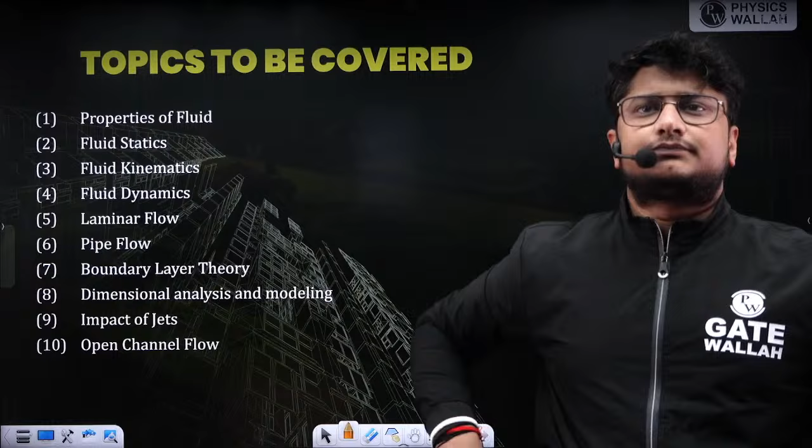Okay. So any doubt or any query which you want to discuss, or directly we'll go for the numerical. Any doubt or any query if you are having first, you can tell me, or else we'll go for the discussion.

Directly numerical? Okay. So first of all, I think it is clear to all of you that in this Super 20, basically we solved 20 questions, which is a PYQ question. But first I will ask those questions to you, which maybe Tiger have asked some doubt or Ankit have asked some doubt. So I will discuss that question first so that all your doubt will be cleared, and then the remaining PYQ I will discuss. Is that okay to all of you? So first I will discuss the doubt which you guys have asked. Let's start with that only.

This question, I think, is from you only. Someone have actually asked this question. Who asked this question? Is that person here?

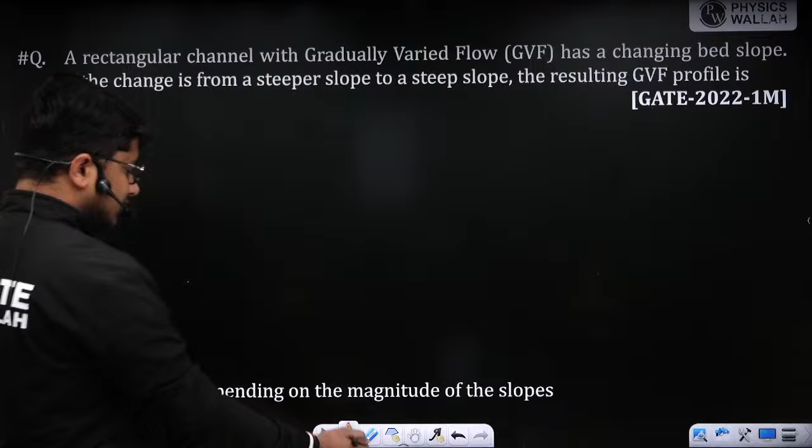If you see the situation here, what they have given you is steeper slope to steep. In the first case, steep, that means somewhere here you will have the NDL, and somewhere here you will have the CDL, because in the steep part CDL will be on top, NDL will be below.

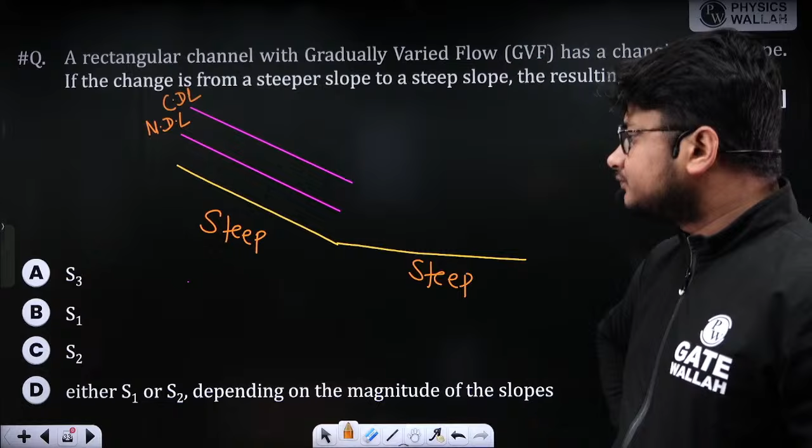Now, as you are going from steeper to steep, that means are you actually increasing the slope or decreasing the slope? I want the answer from you guys. You are actually increasing the slope or decreasing the slope? Decreasing the slope. So if you are decreasing the slope, does depth have to increase or decrease?

The water surface profile which will be there from the steeper to steep, will it be a rising water surface profile or a falling water surface profile? That only I want from you. As I said, this type of question you have to answer with the basic logic which I told you. Only the basic logic is useful. Will it be a rising flow or a falling profile?

You are actually decreasing the slope. So if you decrease the slope, the depth has to rise. And if depth has to rise, will it be a rising water surface profile or a falling water surface profile? Rising. Now look at what you guys are answering. Many of you are answering S2. Is S2 a rising water surface profile or a falling water surface profile?

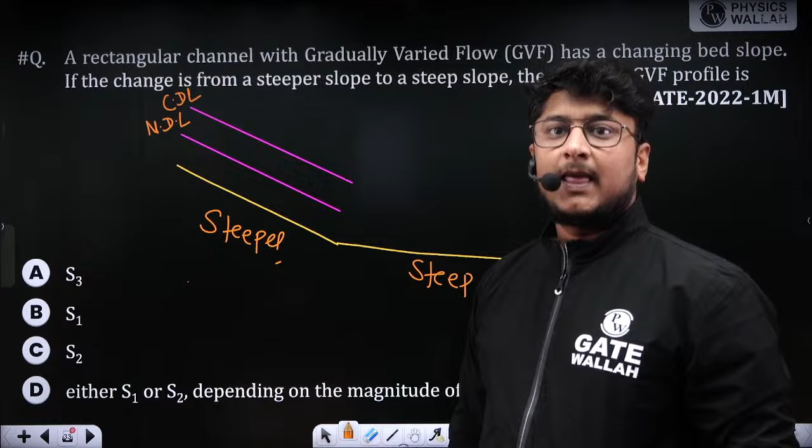Yesterday also I told you, if you don't know the 12 water surface profiles, their nature, their characteristics, then doing this type of problem will be a problem for you. S2 is a falling water surface profile. So S2 is not an option here. It is a rising surface profile that is going to come.

Now in a rising water surface profile, you also have the option of S3 and S1. S3 starts from the channel bottom and S1 starts above the CDL line. Now, in this section, do you really think in the transition part the water level can rise above this situation? Just your thinking I want. Or instead of that, will the water level rise from here, somewhere from here?

Like this. Now if it goes like this, that is a case of S1. If it goes like this, it is a case of S3. Now, after knowing all this concept, I'm asking a basic question to all of you.

Once again, I told you, to solve this type of problem, you need to know the 12 water surface profiles, you need to know the basic characteristics, and then small common sense is also required.

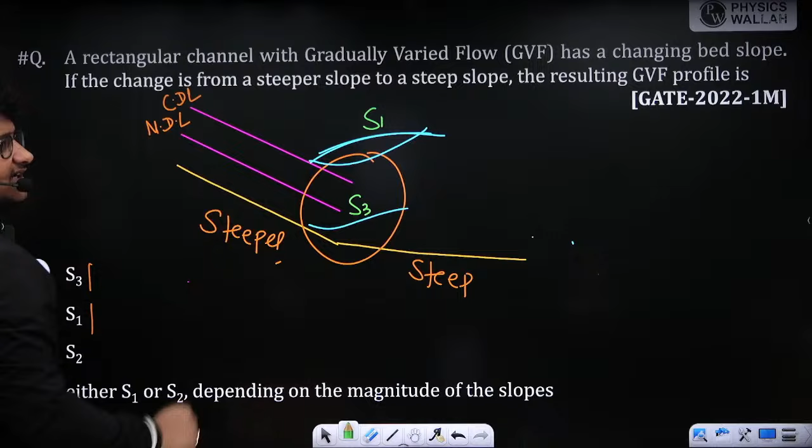If the water is coming from a steeper cross section, it will rise like this. You will find here that your y is lesser than the critical depth. That means you will get a small hydraulic jump type of situation. So it is going to be the S3.

Your answer will be A. I think only one student has answered correctly for this question.

Now tell me, was this question difficult for you? Frankly speaking, I want an answer from you. Was this question difficult for all of you? I want an answer from all of you.

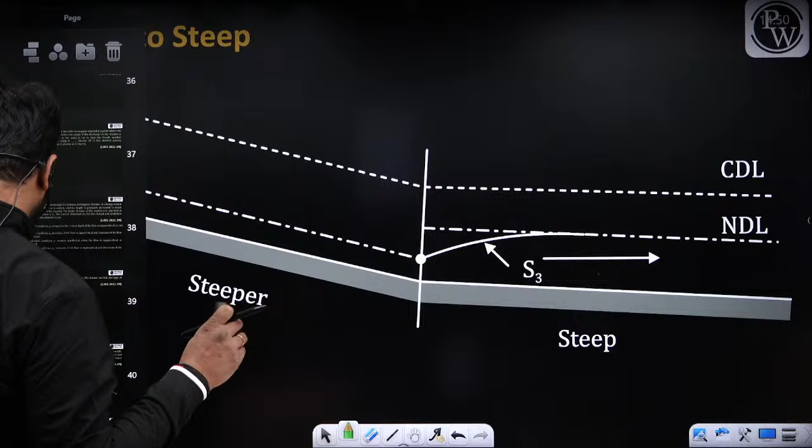Okay, like this, only one more question they have asked.

Somebody who has remembered the data itself, in that case, you have to wait for others.

A very wide rectangular channel, that means simply it is an R equal to Y type of situation, carries a discharge of 70 meter cube per second per meter width. It's a typing mistake. Its bed slope changes from 0.0001 to 0.0009, mild to steep, as shown in the figure. The Manning's roughness coefficient of the channel is 0.01. What water surface profile exists near the point P?

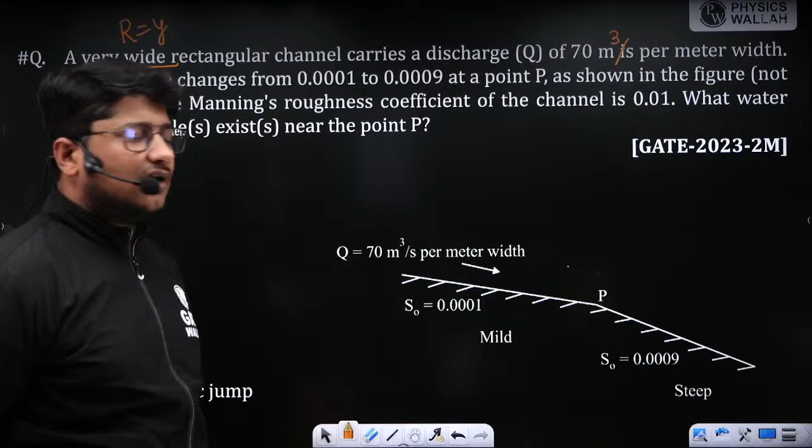Now, if you try to solve this step by step: mild and then steep. So definitely in the mild, after that mild you are having more slope, so the water level is going to fall. If the water level is going to fall, it will be an M2 profile. Now in the steep section, again it's falling only, so it will go like this.

To show this in detail, first you draw the critical depth line. This was the CDL, and this was the NDL.

So this will be M2, this will be S2. Without even solving, we got the answer. Clear? And that's the reason many of you have already answered this.

One more problem - I think you guys discussed this problem a lot in the Telegram group, I have seen. Try this question.

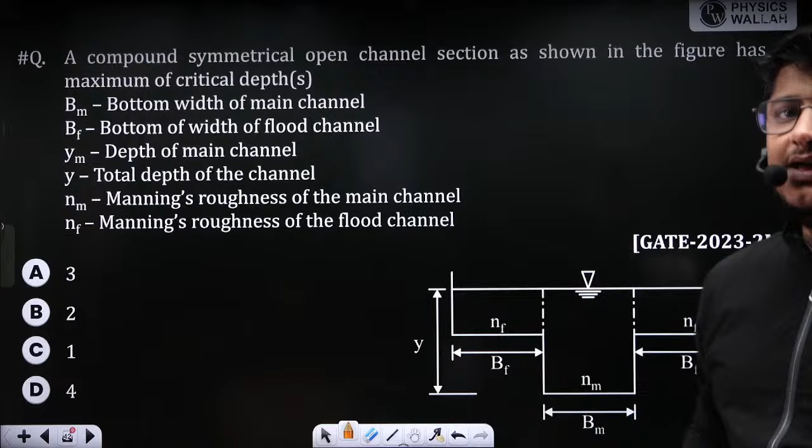Now this problem is something like when it came in 2023, many of you guys were not able to solve it. I can understand the reason why - in our GATE syllabus, we generally don't discuss the combined cross section. If you use your logic, you will get the answer, but generally we don't discuss the combination.

This is basically a combination of section. We can call this a compound system or compound section. Anybody? Any guesses or anything like this?

Compound section - we generally discuss this when you go for water resource engineering masters. There we discuss the compound section a lot. During my masters, actually, I have studied these things.

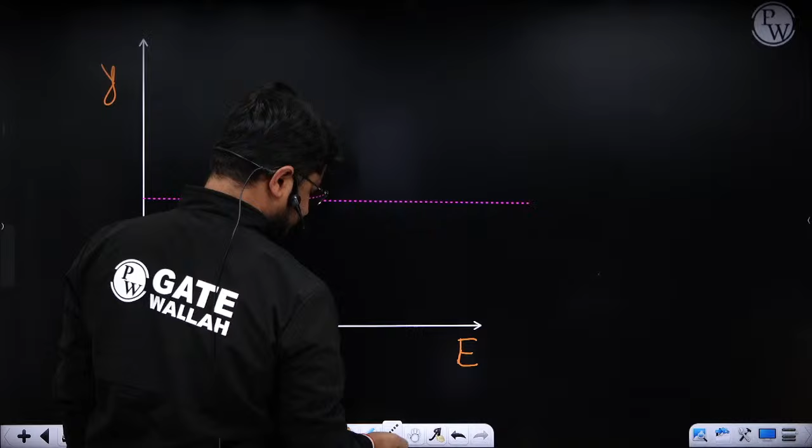So in a compound system, this side you are having the Y, and this side you are having the specific energy, E. A small curve I am making for you. After making that curve, then you can understand this problem easily. This is the flood plain.

And that is a depth Ym. That is a depth Ym. Okay. Gamer PUBG is telling, sir, not able to understand what they are actually asking. You know the concept, only the application part you don't know, because I know this question was a little bit out of the track, but we can try with the basic knowledge you have for the critical flow.

Now, what they're asking you here, as it is a compound system, they want the maximum number of critical depths which is possible. What they have given you, BM is the bottom width of the main channel. This was the main channel here. So this is a cross section of the channel.

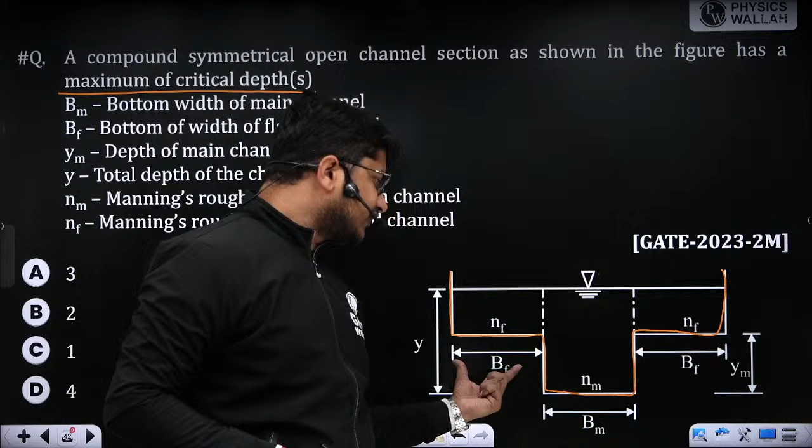If you notice in this cross section, here we are having a different Manning's coefficient, NM. Here we are having a different Manning's coefficient, that is NF. Here we are having a different width, and here also a different width. Now, Ym is the depth of the main channel, and Y is basically called the total depth of the channel.

That means currently the flow is at this point. All the terms are known to you. Now my question is to all of you. See, here they are asking only one case, but I'm going to explain 3 cases, because maybe in future if they ask a question based on this topic, you guys will be able to solve it.

Now see here, you only will tell me. Now if flood is not going on, normal flow is going on. So during the normal flow, only the main channel will be involved. Yes or no? Because this channel is having some depth, na? So this part of the cross section will be involved only when you have some floodplain or extra flow type of situation. In a normal flow, you will have only this part in a working condition. Am I right or wrong?

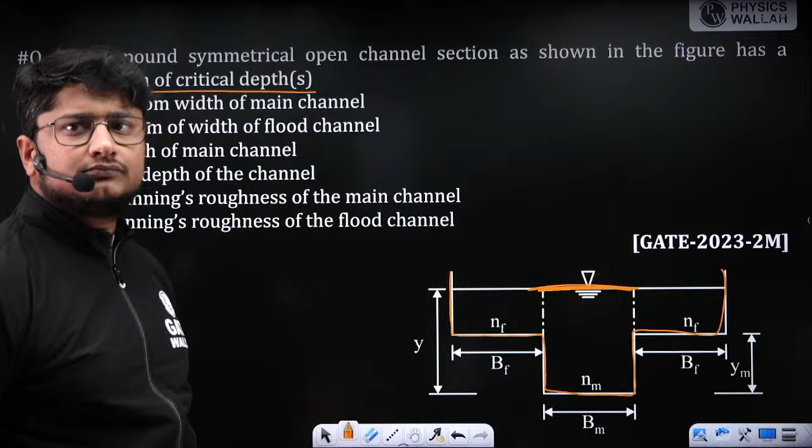In a normal flow, you will have only one part working, that is nothing but the main channel. Do you all agree for this point? Basic discussion. Whatever it is, rectangular, square, whatever cross section, during normal flow only this part of the channel will be in a working condition. Now that is the first case for you.

During that first case, how many critical depths are possible only when the main channel is working? If I want to draw it here, it will be like this. YC1, this is your C1 point. Only one. Okay. Now go to the next case.

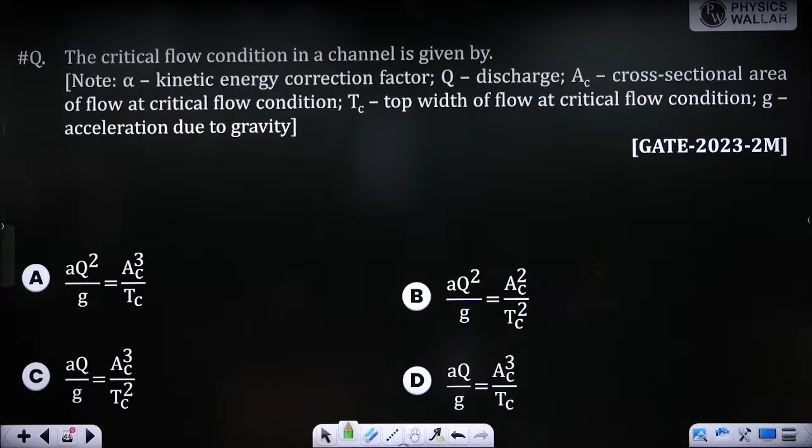Now once complete flow is going on, in that section, do you really think more than one critical depth will be possible? The reason I am saying it is because here we are having a different Manning's coefficient, that is Manning's roughness constant, different than the main channel. So with different discharge, more than one critical depth will be possible. I want something from you guys.

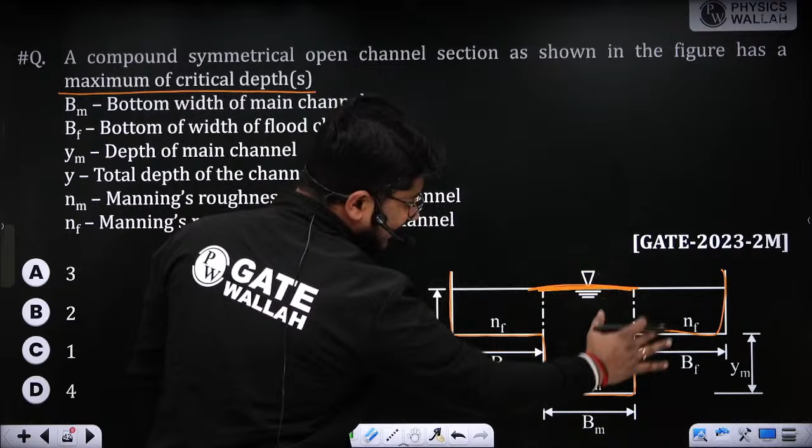Now, the same thing if I want to draw here, the situation is that when the flood came, the complete area will be flooded. Now the extra flow is going on. In that case you will have something greater, let me make it somewhere here. This is for a different discharge, which is definitely more than Q1, which was the initial discharge.

Okay. Now, in the combination phase, that is in between, you will notice three types. It is a standard figure, so that is the reason I am drawing a random figure. One is C3, in between is C2, and the normal was C1. And this discharge is Q2. So Q1, Q2, Q3, as you shift right, Q1 will be lesser than Q2, and Q2 will be lesser than Q3.

That is the case we need to understand. They are talking about the maximum critical depths possible. So the critical depths will be C1, then C3, and in between we have C2 also. Clear regarding this?

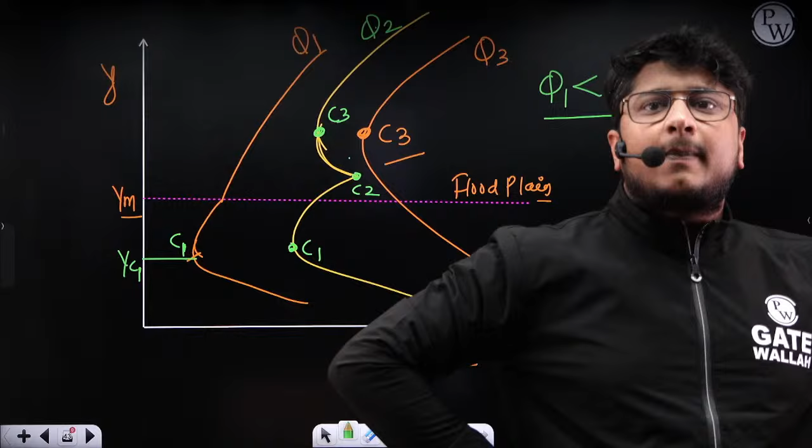What if there was no symmetry? First of all, understand, I'm not talking about a case which is related to this part. What I'm talking about, these are the cases which will be possible. If your flow is only under this, only one critical depth point you will find. If you are having more discharge, very high discharge, in that case again you are getting only one critical point. Critical point means maximum discharge point or minimum specific energy point.

Now, if you are having in between the discharge Q1 and Q3, you are having the 3. Actually, C3 and C1 exist, and between this, we are having a C2 also. So that is the reason we have made this type of curve. And it is not related to the symmetry part.

That means you will say, sir, here if you are having a different width, here also you are having a different width. In that case, the value can change, but not the situation, not the concept. Is that clear? Value-wise, YC1, YC2, YC3 can change, but situation-wise it will not change.

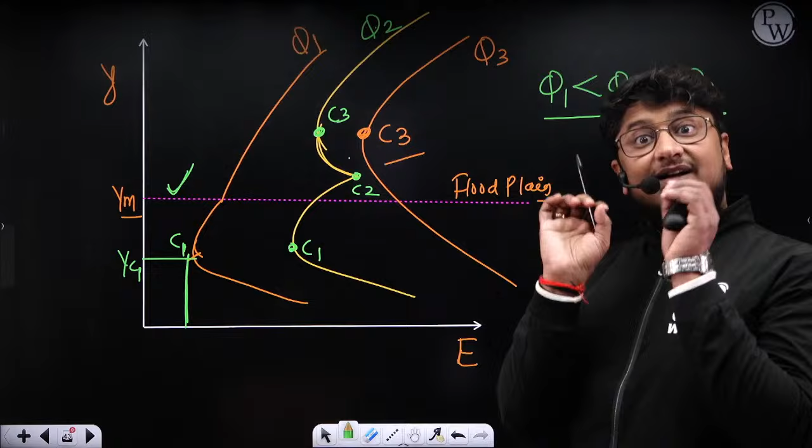Like your YC1 will be always less than YM, lesser than the floodplain. That is completely true. Even if you are changing the symmetry and all, your YC3 will be more than YM. That is also completely true, irrespective of what cross section you are having.

Now, once again, as this is a part of your question, that's the reason I have discussed. Still, I have not included this part, compound symmetrical open channel, in our course. But if you guys want, I will include this for future discussion. What do you think? Should I include this? Because only 1 year they have asked, and generally we don't include it in our syllabus unless they ask 1 or 2 times more.

Actually, it's a part of your master course. When you go for a master's in water resource engineering, then you have to discuss this compound channel in detail. Here I have told you directly, but you have to make it also, by taking data and all. Right now, the graph I have given to you.

Okay, so right now they have asked you about the maximum one. So that's the reason 1, 2, 3. Your answer was 3. If they ask the minimum one, then our answer will be 1. Clear? Clear to all of you?

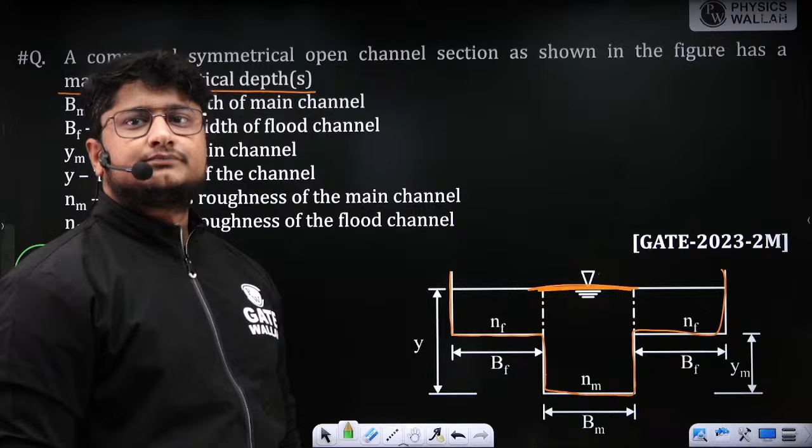Okay, so this question I think many of you have asked me. That's the reason I have discussed it. Telling this much detail in Telegram is difficult, na? Achha, one more question. I think this also someone has asked. Is it the right problem? I'm not able to type it properly, so I am using the screenshot here. Who has asked this question?

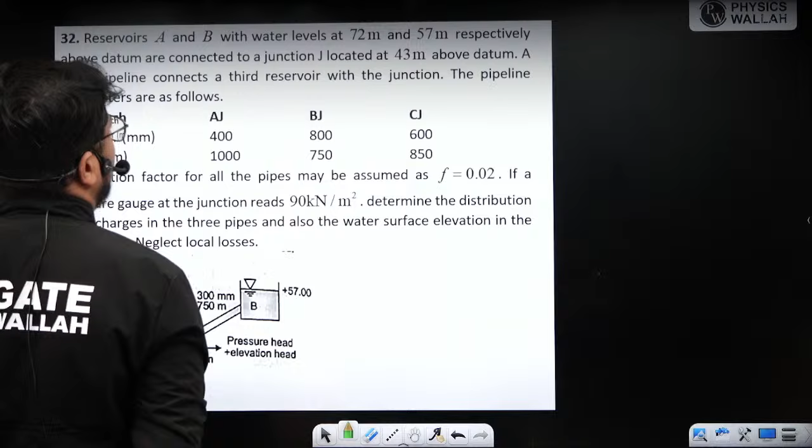First of all, your name is something which I'm not able to pronounce. Try this question. Try this question. Okay.

Reservoirs A and B with water levels of 72 meter and 57 meter respectively above datum are connected to a junction J. So J was the junction. Three reservoirs A, B and C. A and B, okay. Junction is located at 43 meter above datum. So they have given you the datum head. And for reservoirs A and B also the water level, so there also they have given you the datum head, okay.

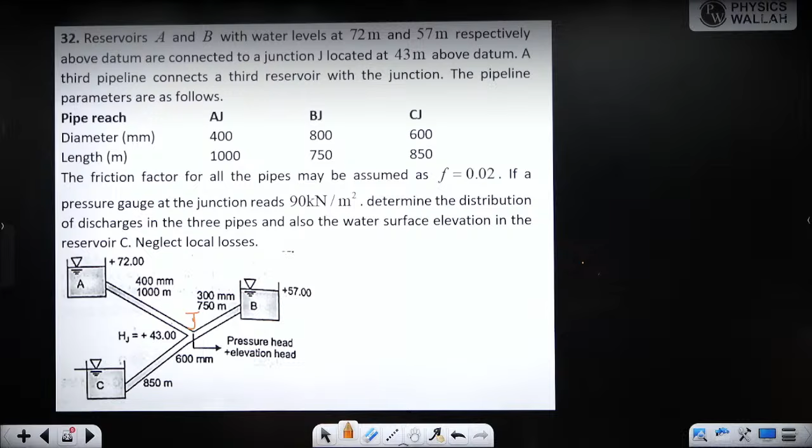The first thing I want from you: tell me the piezometric head at junction J. Piezometric head means pressure head. Pressure head is 90 kilonewton per meter square divided by its water, so 10 to the power 3, and the g value they have not mentioned, so I will take 9.81. And the elevation head is 43 meter. So piezometric head at junction J, how much are you guys getting? First things first. According to Kushal, 52.174.

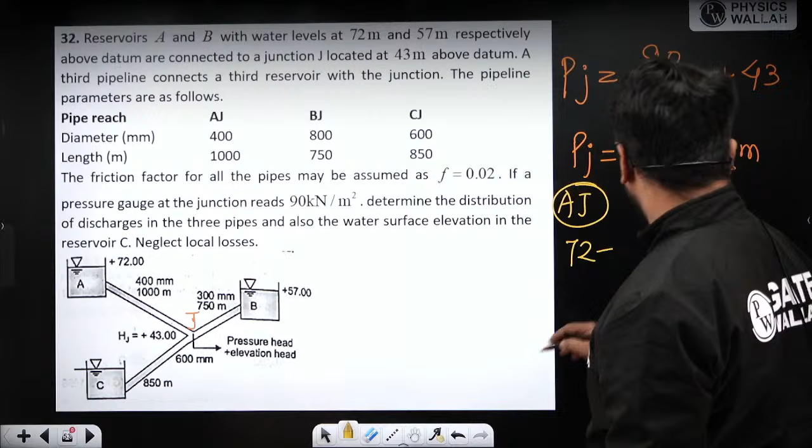Now here we have a piezometric head of 52.174, and for A and B they have already given you the water surface elevation. That means the pressure will be 0. So the total piezometric head here will be 72 and 57. They want to find out discharge, so one by one I will find it out. Let's first talk about AJ. For AJ, the head loss will be 72 meter minus 52.174, and I'm considering only the friction losses here. So for that reason, f is given to you. So it is f into L into Q AJ squared divided by 12.1 d AJ to the power 5.

Now according to the question, 72 minus 52.174 is equal to the value of f we have. Friction factor is 0.02, which is given to you. Length AJ is 1000. f L Q squared, so discharge is something I want you to find out, divided by 12.1 into 0.4 to the power 5. So I expect all of you to give me the QAJ value in meter cube per second. First part.

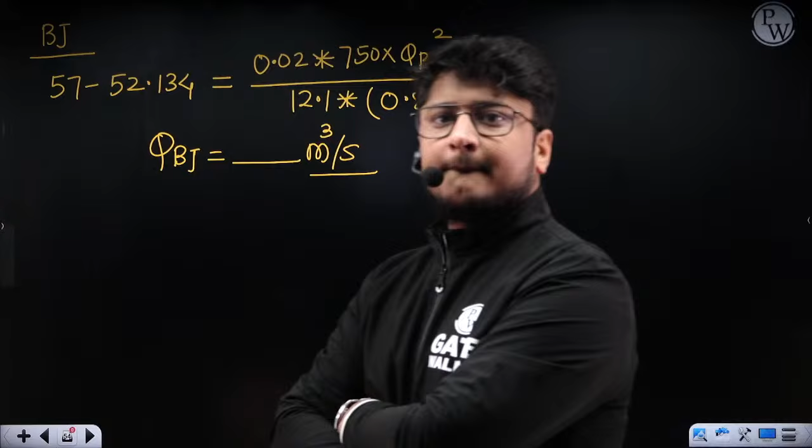In this PJ calculation, what we are doing is we have the pressure value also. At this junction we have some pressure. These 3 points are open to atmosphere. So if these 3 points are open to atmosphere, what pressure will they have? Gauge pressure will be 0, completely atmospheric pressure. But these 3 tanks you have connected to a junction J, and at that junction you have some pressure which is given to you. Is that clear? The 43 which is given to you at junction J and all.

Value of PJ incorrect, corrected value is 43.009. Okay, is this wrong? It's kilonewton, so the person who gave it is right. It will definitely be more. Now see, simply copy-pasting will not help you. Those who answered 52.174, I am hoping it will be greater than 43. It will not be near 43, that is for sure. I have not calculated this, so I cannot say it is right or wrong, but definitely it will be more than 43. You guys have not included the kilonewton part. Am I right?

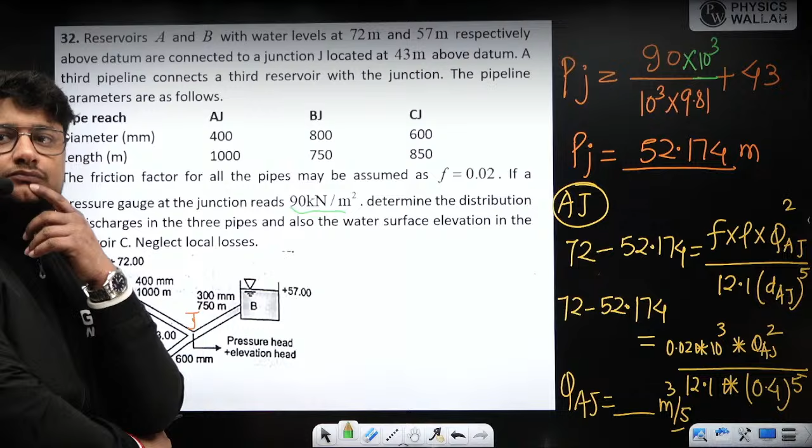QAJ according to Ritika, it is 0.35. QBJ according to you guys, we are getting 1.134. Very high. Is it right? QBJ we are getting 1.134. Again very high. Check, everyone check this. 1.134 is a very high value, man.

If you all are getting the same, then I will take that only. But right now I want you guys to recalculate this. Okay. This much high we are getting the discharge. Let me calculate this. Diameter is wrong. Diameter is 800 only we have taken, na?

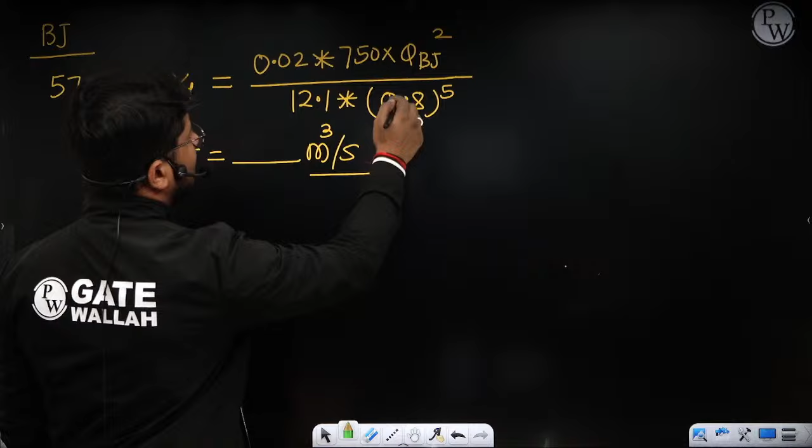Oh, here it is given 300 mm. Here that person made a typing mistake then. So you guys are answering, I think, according to the dia. So according to 800, maybe it will be the right answer. We can take 800 also, no problem. Now how much are you guys getting? According to my calculation, I am getting around 0.097.

Now, when it comes to the third part, what they're asking you finally in this question is to determine the distribution of discharge in the 3 pipes. So in 2 pipes, we have calculated this. Third pipe we can calculate. So third pipe it is nothing but QCJ. As you can see here the total head is 72. The flow is going like this. From here also the flow is going like this. So definitely at the junction, after meeting these 2 flows, it will go in this direction. The flow will be from J to C.

So total discharge will be 0.35 plus 0.097. Whatever you guys are getting, that will be the right answer. Then they are asking another thing also: the water surface elevation in the reservoir C. That means just like these two, they want elevation for this also. No problem, we'll do that.

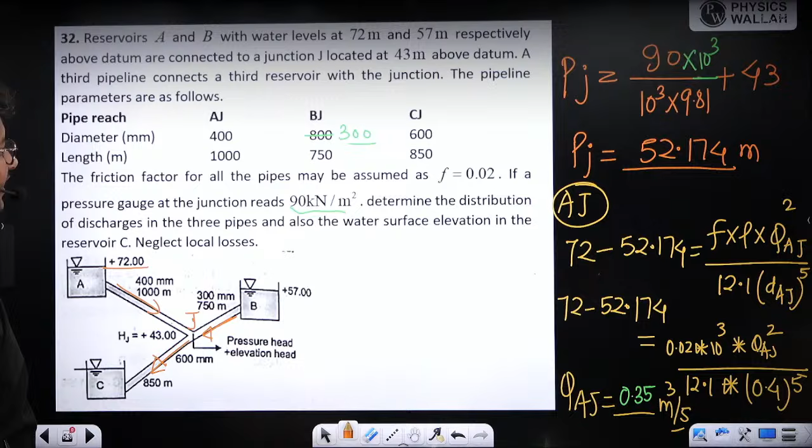Piezometric head at J minus EC, or elevation head at C, will be equal to again F 0.02. What about length? This time we'll take length from here only, or we'll match both the data. So length is 850 at both the places. So FL into Q, already we have. So directly write the data. After summing it, 0.447, na? 0.447, 12.1. Diameter is 600 mm, so it is 0.6 to the power 5.

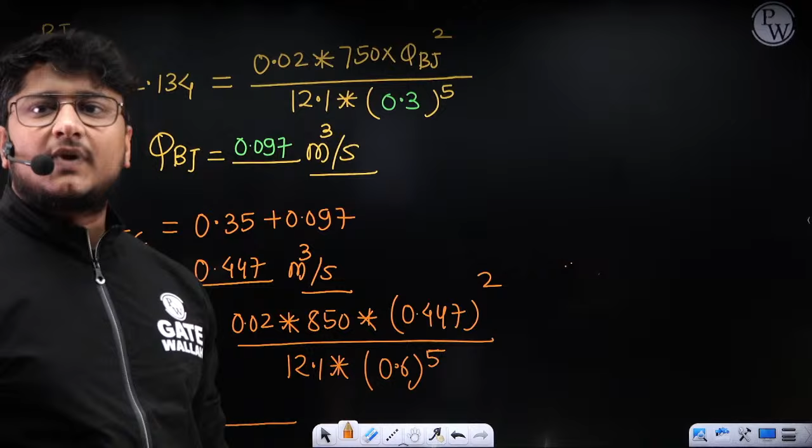Now PJ is something which you already have. It is 52.174. I want EC, elevation head at section C, or elevation head at container C. And whoever asked this question, is it clear to all of you, my dear? 48.564, as you all guys are suggesting. 48.564 meter.

So this question, I'm assuming, Ankit has actually asked. I think he has asked a question related to this; that was a 1 mark question. Because of that, I have taken a bigger problem based on the same concept, so that if you understand a bigger problem, solving a small problem will be very easy for you. Maybe 4 or 5 years back, they have asked a question based on this concept only for 1 mark. So now after solving this complete question, clearly you can solve that question easily.

That was actually a 1 mark question, only asking the discharge part. And this is also a GATE PYQ only. It is actually in the 90s they asked this question. At that time they used to ask for 5 marks.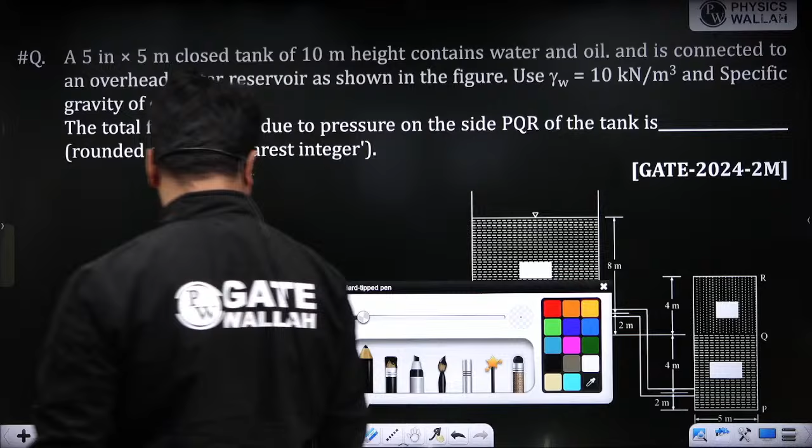Okay, another question again. This question also someone from the student community asked me on Telegram, and that question may disturb you a lot, but I don't think so. Especially for sincere students who have practiced a lot, this type of problem is not difficult. Try all of you. Any data you find not typed properly, you can tell me. Here it was written water, this was oil, and this was again water.

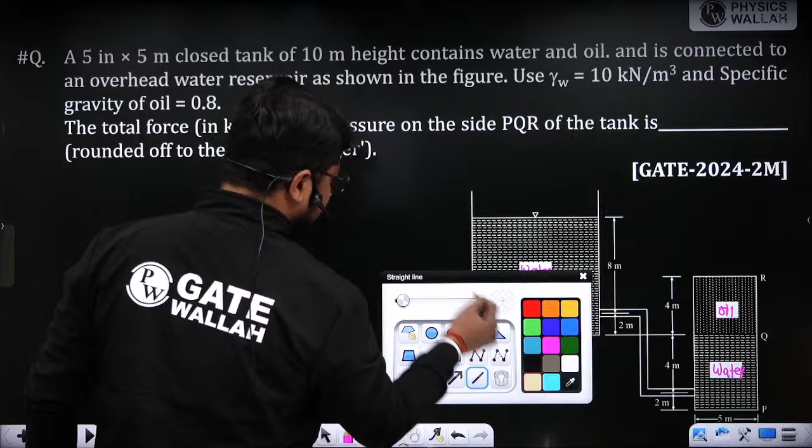Anybody got the value? What do they want? They want the total force due to pressure on the side PQR. This side they are talking about. So total pressure force they want you to calculate. So the point we are having R, then somewhere here we are having Q, and then somewhere here we are having the P.

What I want from you guys is the pressure at these 3 points. Can you calculate? Pressure at R, pressure at Q, pressure at P. These 3 values I want.

How much will you get the pressure value? First of all, tell me whether you guys need my help or you guys are solving it. If you guys are solving on your own, in that case, I will not help you. I will wait for your response.

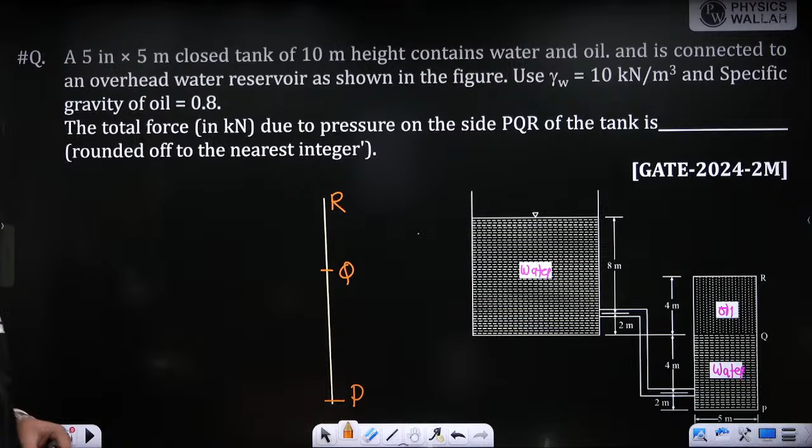Like if I have to find out pressure at R, again basic logic which I told you in the fluid statics class also. If you are at this point, it is open to atmosphere. The specific gravity of oil is given to you as 0.8. These are the two data which are mentioned to you. First of all, if I have to find out pressure at point R, I will start from here. Let's take this point. So 0, which is the gauge pressure or atmospheric pressure, you can call it.

Now this water pressure will be 8 plus 2, 10. So gamma W is already given to you as 10 kilonewton. So 10 into 10 to the power 3, gamma into H. H is basically water, that is 10 meter height. Okay. Now I am here.

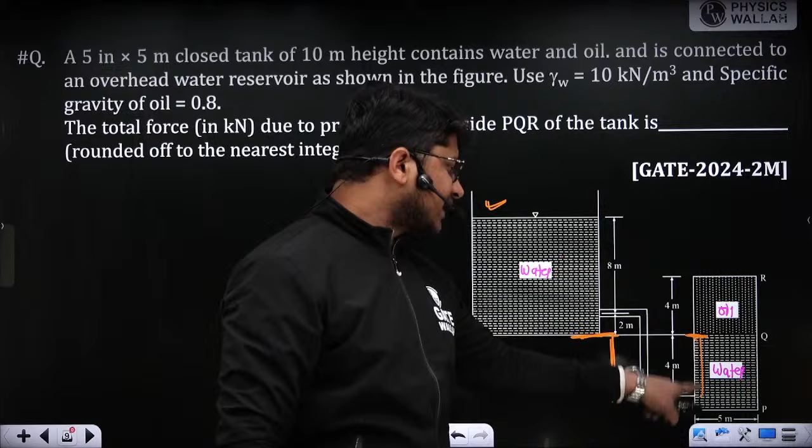Now if you notice, same level of water depth you are going down, and then again same level you are going up. So down means plus, up again the minus. That means at this point and this point the pressure is the same. So I'm not including that. One time you have to do the plus, another time the minus. 4 meter you are going down in the water, again 4 meter up in the same liquid, water only. Now from this point again directly I am here.

Then R is somewhere 4 meter above but in oil. So minus, oil specific gravity 0.8 into 10 to the power 3 into height 4 meter, which is given to you. Okay. Now tell me the PR value in kilopascal. I want the value in kilopascal.

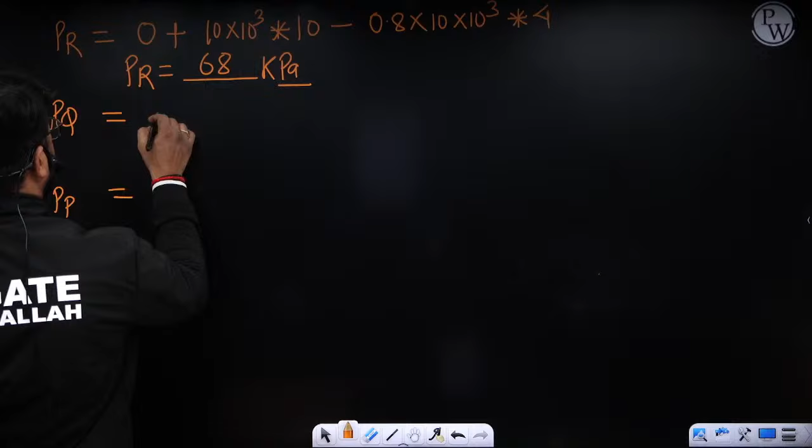68. What about PQ? For PQ, as I told already, at this point and this point the pressure is the same. So it is going to be 10 into 10, so it will be 100 kilopascal.

What about PP? First you are going 10 meter up to this. Then again you are going down 6 meter, 4 plus 2, 6. So 6 meter again in water only. So total pressure at P will be 16 into 10, that means 160 kilopascal. If you are able to find this, then half of your work is already completed.

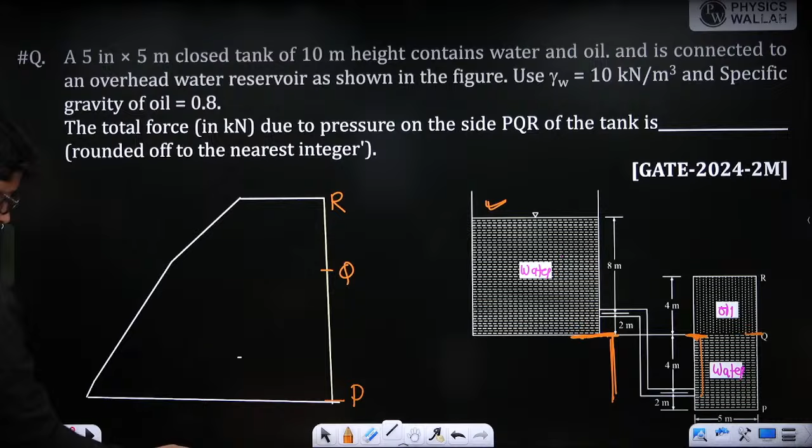Now I will simply draw the diagram for you. Which diagram am I drawing? This is a pressure diagram. So this is 100. Okay. This is 68. This is 100. This is 160. And this is your pressure diagram.

Now to find out force, what do you do, my dear? You just find out the volume of this pressure diagram. To find out force, half into RQ, height is 4. So 4 by 2 bracket 100 plus 68. PQ is 6. So 6 by 2 into 100 plus 160.

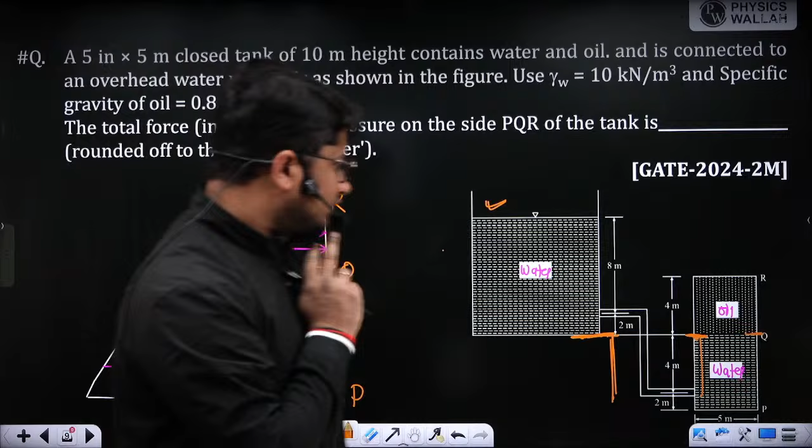So F value, have they given you width and all? Is it given? 5 meter into 5 meter closed tank. So I think this tank they are talking about. So 5 meter into 5 meter. So width is given. So you have to multiply that also because you need volume.

Tell me the value. Final value. Basically, we have made a pressure prism here, and the volume of the pressure prism is going to give you the total force. That only we are calculating.

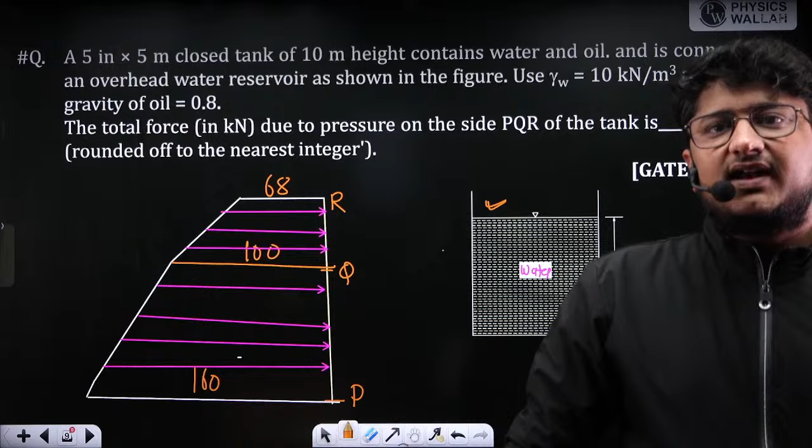Because nobody has answered me this. In the first attempt, nobody has given me the answer. After attending class also, if you are not able to find out a pressure prism or pressure at any particular point, you know why? It's only because you have not solved at least 10-20 problems, especially from pressure prism. You have not practiced that part. Otherwise, this question is not a difficult problem.

Okay, I will give you one more question. Try this question.

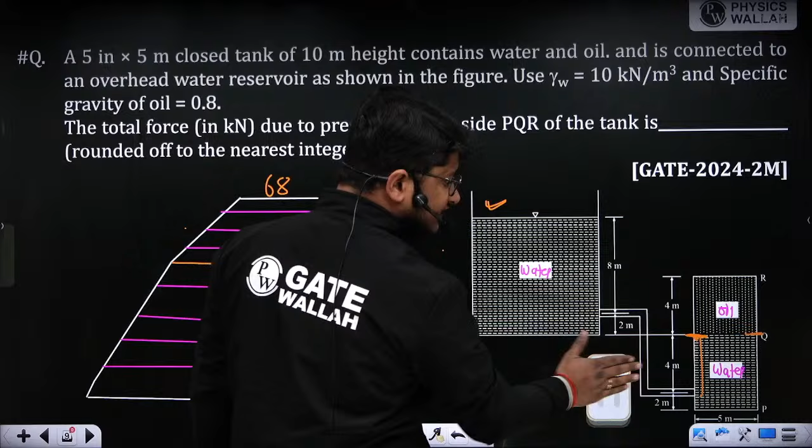Sometimes I generally reply to all the doubts in Telegram. I try to reply, but sometimes like this question, why I have given you the last question - few days back in my Telegram group, one student asked. Look at his question. That clearly shows that he has not attended class, or maybe he was completely out of zone at that point.

Sir, here the pressure is whatever pressure at the bottom. Why are you equating with the pressure at Q? That was his question.

That clearly shows I may be soft to you, I may be hard to you, but hard things are going to help you. That's why I'm telling hard things to you. If you actually forgot this thing, that means you actually forgot the complete fluid statics chapter. You have to revise the chapter again. It is a hard fact, but you have to do it.

Somebody who is asking, sir, why here and here the pressure that person in the solution has taken same? Because if you are going down in the same liquid and then again come back with the same liquid, that means first you are adding the pressure, then you are subtracting the pressure. The addition and subtraction both in the same liquid of water, so in that case, we can take this.

Many times you guys have taken for this type of setup, many times you guys have taken the red line concept. Why do we take a red line here? First of all, it is passing through an interface. Second thing, we try to cancel this part - same type of liquid only you can cancel, not two different types of liquid. So if you are going down and then again going up, both are same only. That's why at this point and this point, we take the pressure same.

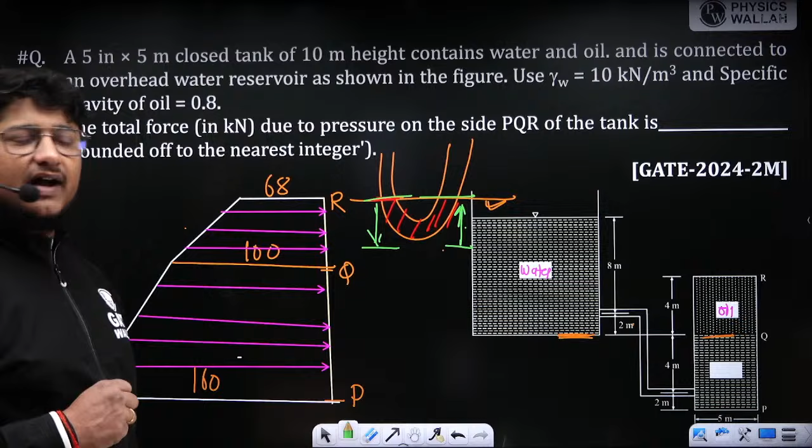Very good, Abhinav, it is a red line concept. So if you forget this, then sometimes I also get hurt if you ask this type of doubt. That clearly shows that person or student actually did not revise the fluid statics chapter itself. And then you will say, sir, fluid mechanics problems are difficult.

Try this question, bacha.

We as a faculty, now also get motivated - we also get motivation through your doubts. If you keep on asking good doubts, that actually motivates us also.

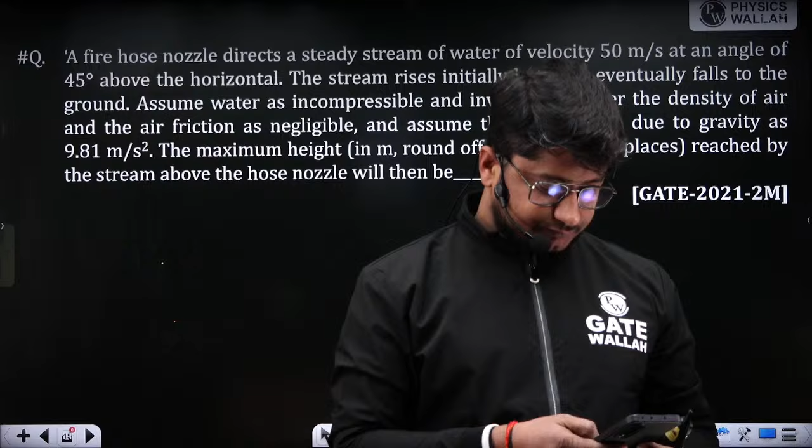Look at the doubt, look at the doubt. Sir, within the boundary layer region, laminar flow through pipes and turbulent flow through pipes - in all three cases, it is in Hindi - we only consider viscous and pressure force. Why do we neglect gravity?

Why do we neglect gravity? So I took 5 minutes to explain this to that student, but actually that type of doubt relaxes me. Whatever stress of teaching or whatever mental stress we are having, that gets relaxed after seeing this type of thinking from your side.

By the way, if I ask this question to all of you, what will your answer be? What will you guys answer? Have you understood the question now?

I'm going to tell you that part in English, which that person has told. Within boundary layer and laminar flow through pipes and turbulent flow through pipes, in all these three cases, we take only viscous force and pressure force for the discussion. Why do we neglect gravity forces? What will be the reason behind this? Yeah, what would you guys reply if someone asks you this question?

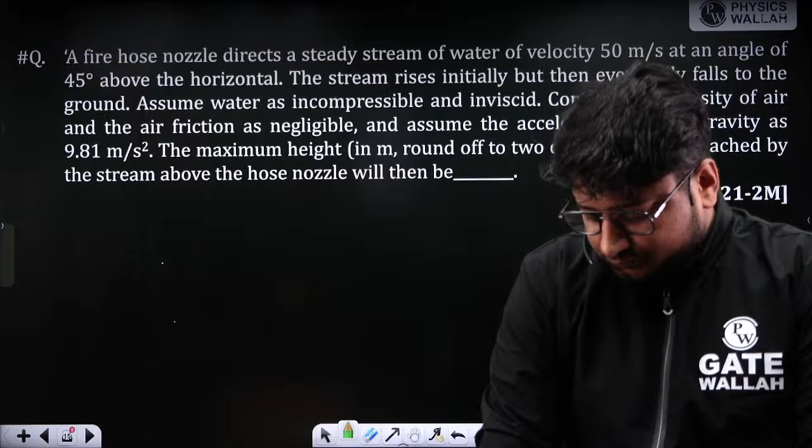In the discussion of laminar flow, you have seen we have taken the pressure forces, we have taken the viscous forces. Viscous force is taken because laminar flow is completely viscous flow, so you can consider that as a viscous flow, and pressure force. Why have we not considered the gravity part? Why have we not considered the gravity forces?

All of you think about this. The answer is very simple, but thinking in this direction actually motivates me. Somebody answer it, it is actually a very simple question.

If you notice, let's take an example for laminar flow. If you remember the derivation for laminar flow, we are talking about the x-axis or y-axis. The flow is happening because of the difference in pressure, because of the pressure gradient, in the flow direction we are talking about. We are not talking about the vertical. So in the flow direction, the flow is due to pressure differences, and definitely the resistance is given by the viscous forces. If you talk about something vertical, then the gravity force will come in contact, or the gravity force will be important.

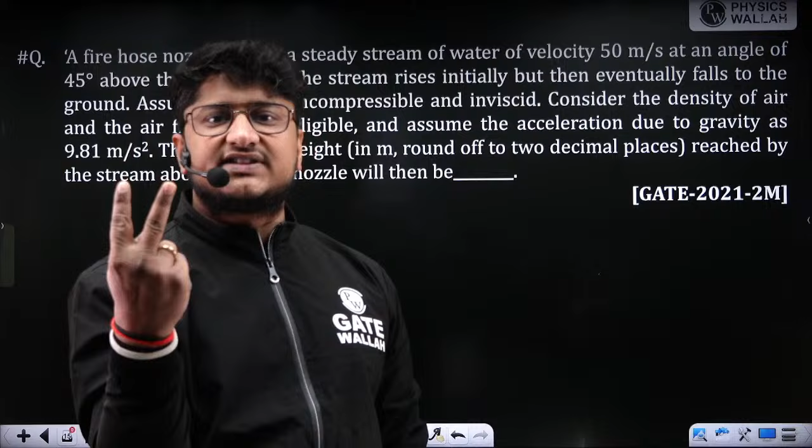If you remember the laminar flow circular pipe discussion, we are talking along the flow. So along the flow, only two forces are important for us. One is the pressure force, because of the pressure gradient only the flow is taking place. The second is the resistive force, which is given by the viscous force. That's why only these two forces are included, and you are talking along the axis.

So the vertical force will act across the axis, or in a transverse direction you can call it, and we are not analyzing in a transverse direction. So gravity force effect will come when the pipe will be vertical. If the pipe is vertical, then gravity force effect will come. But generally in that situation also we neglect the gravity mass part because it has lesser importance, lesser effect. But yes, the effect will be there. If the pipe is in vertical direction, in that case gravity force will also come into the picture.

Now this was the answer. Regarding this question, I think all of you have answered correctly. This question is actually not a fluid mechanics question. This is actually a physics question.

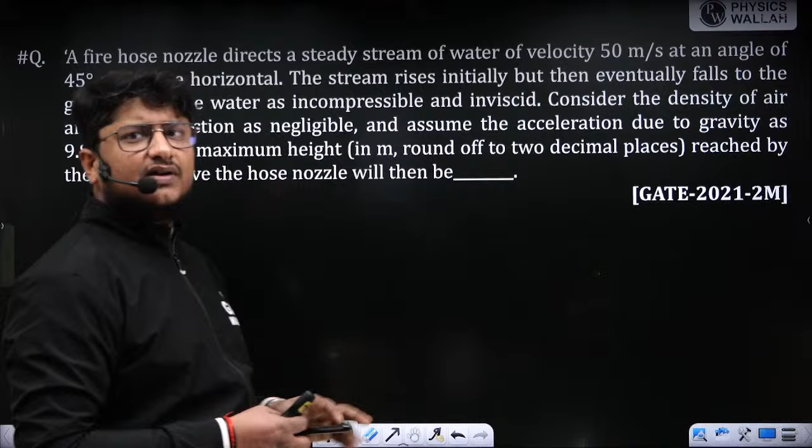A fire nozzle directs a steady stream of water of velocity 50 meter per second at an angle of 45 degree above the horizontal. So this is actually a projectile motion question. I think you guys have solved this type of question in your 11th, 12th class physics. This angle of 45 degree is given to you. Above the horizontal, the stream rises initially but then eventually falls to the ground, because it will go like this - projectile motion. This is the ground.

Assume water as incompressible flow and inviscid, so we have density and viscosity not considered. Consider the density of air and the air friction as negligible, so they are neglecting the effect of air density. And assuming the acceleration due to gravity as g equal to 9.81. What they want from you is the maximum height reached by the stream above the hose nozzle. That is what they are asking you.

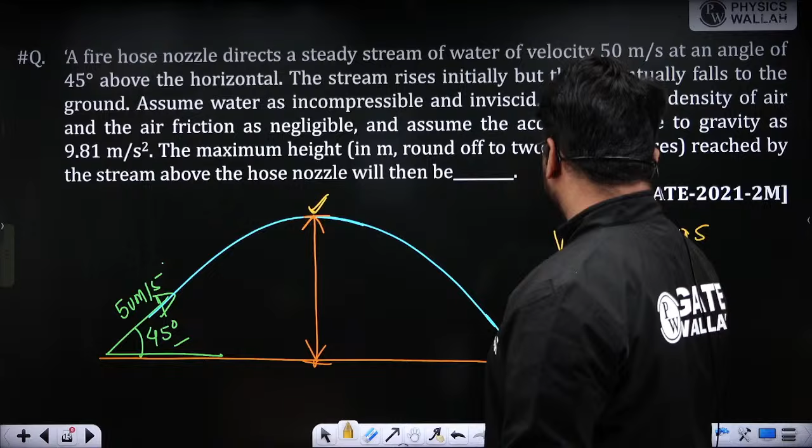So if you remember the three basic equations, v square minus u square equal to 2as. I'm applying this equation in the y direction. At this point, you have the final velocity as 0, because at this point the maximum velocity, or the instant velocity at that point, will be 0. Minus, you have to find out: it is 50 sine 45 whole square equal to g, which is 9.81, into s. This distance s is s only.

So can you guys give me the value for s? By the way, it is going up, so g will also be minus only. With a g, it will be minus, so this minus and this minus will get cancelled out. You will have 50 sine 45 whole square divided by 2 into 9.81. So calculation-wise, you can give me the answer.

Try the next question. Acha. This was 50. Oh, sorry, mora maaf karo. This was 50. Okay, try the next question, bacha.

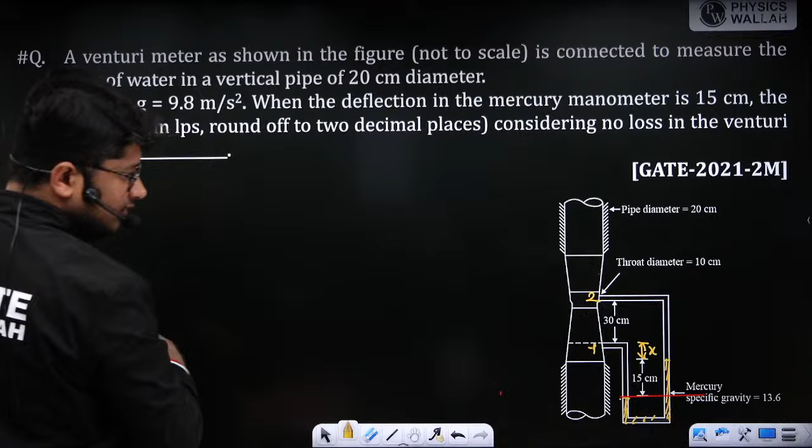Then you continue with the same liquid, water is flowing in it. So P1 plus rho W into G into the distance, which is 0.15 plus x.

Then for this side, if I calculate, it is P2. Again in water we go 0.30 plus x, so plus rho W into G into 0.30 plus x. Then some part of mercury is also involved here, so rho Hg into G into mercury's 0.15.

What I'm interested in is P1 minus P2, divided by rho G. So the remaining part I can write down as P1 minus P2 divided by rho G equals...

This part will be completely 0.3 minus 0.15, and here this part will be 13.6 into 0.15. Am I right?

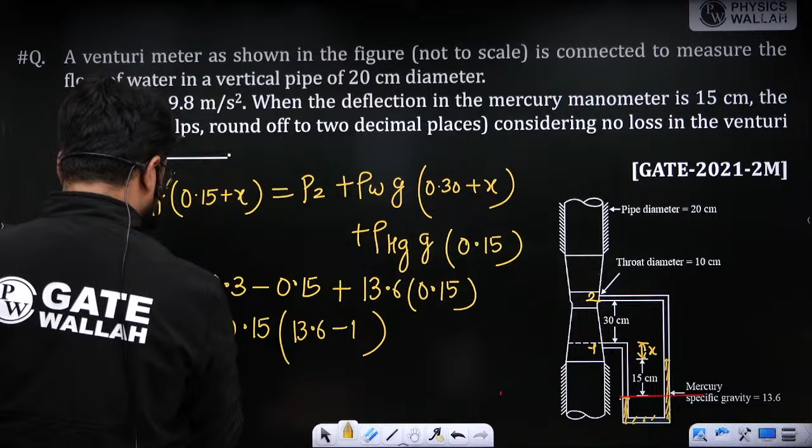I don't think anybody has any doubt here. Let us simplify: 0.15 bracket 13.6 minus 1. So it is 0.15 into 12.6. You can give me the value here in meters.

How much did you get? Now this is the basic way you can find out the pressure difference, or how you can find the H value here.

Another way, which I gave you in class also, you can directly use when the deflection in the mercury manometer is given as 15 centimeters, that is the manometric reading. If it's a differential type of manometer, I can directly go with the H part: delta H times Sm upon Sf minus 1. This formula I already gave you, so if you remember it, you can directly use the concept and reduce the calculation.

So 13.6 divided by 1, 0.15 into 12.6, the H value here also comes out the same, 1.89. That's why in class I gave you this formula; it came from the basic concept. I told you both the basic concept and the formula, it's up to you which one you want to try.

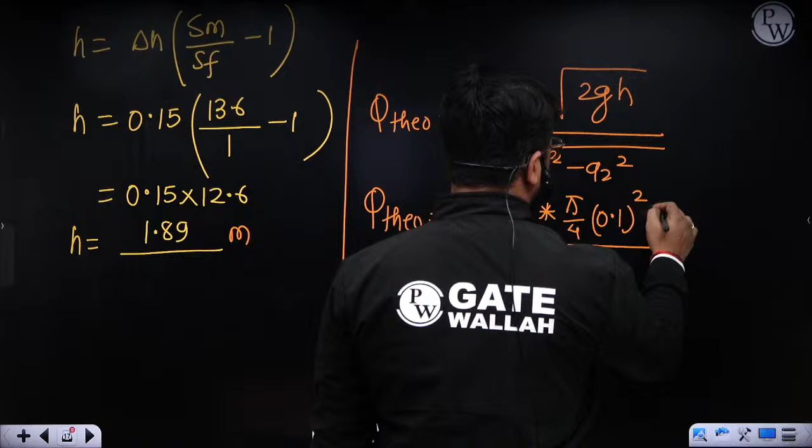D2 is 10 centimeters, so 0.1 whole square into under root 2 into G value, which they've given as 9.8, into H which is 1.89, under root A1 square that is pi by 4, 0.2 whole square, minus A2 square pi by 4, 0.1 whole square. After solving, I think all of you have already given me the answer.

How much? According to Kushal, it is 49.4 liters per second. What about others? This question was easy, directly formula based, still only one answer I got, and that too from Kushal.

You guys have to verify this, whether Kushal's answer is right or wrong. This is a directly formula based question. If you get a question from the Venturi meter, it's actually easy because you know in what direction you have to proceed, since you're completely aware of that direction.

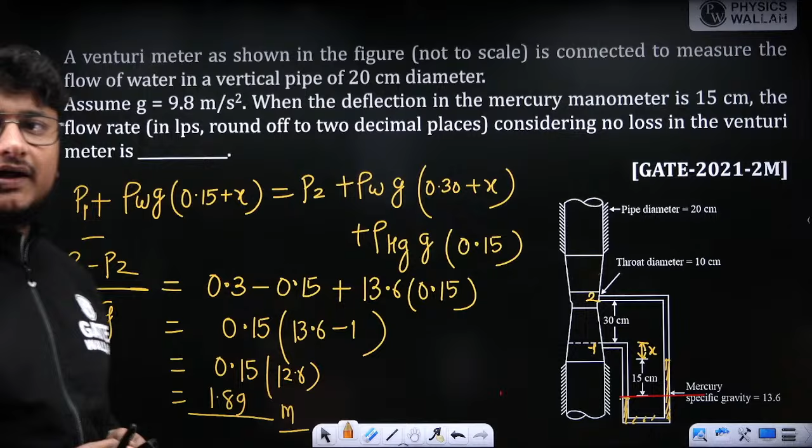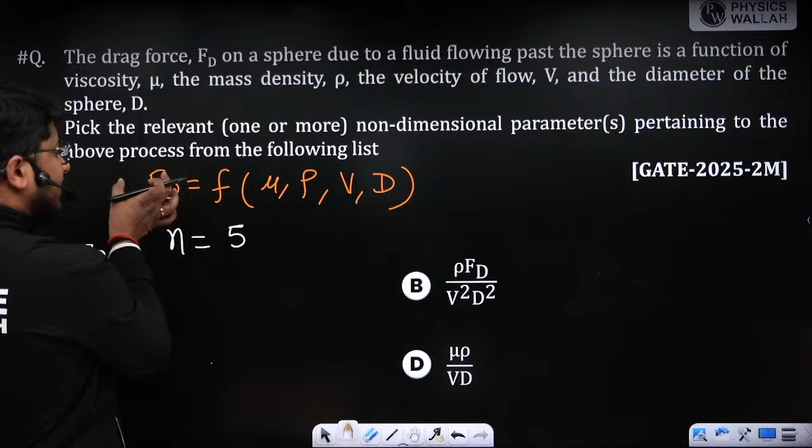Now, first of all, I have to select n value, which is 1, 2, 3, 4, 5. Dependent and independent variables. So total n value is 5 here. Next, number of repeating variables I have to select. So one will be from geometrical criteria, another will be from kinematic criteria, and the third will be from dynamic criteria. So in dynamic criteria, you have two options. Either you can go through mu or rho. It's completely up to you. If I'm using rho here, m will be 3. Okay.

Now, if I write the first non-dimensional term here, it is pi 1 equal to rho to the power a1, then v to the power b1, and d to the power c1. Here, if you notice, they are actually giving a relation between Fd and all these things. So we have to try that only. Let's try, because only 2 times we can try, one with mu, another with Fd. So let's try with the Fd first, which is a drag force.

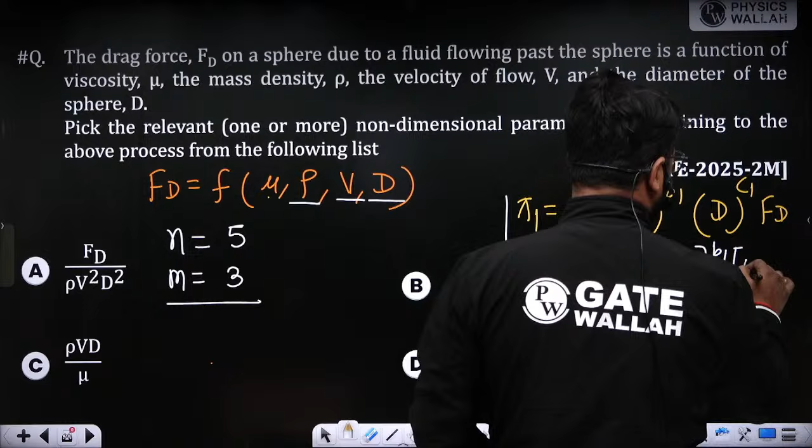Pi 1, M0 L0 T0. Density dimension is mass upon volume. So ML minus 3 to the power A1. Velocity is L by T. So LT minus 1 to the power B1. What about D? It is L only simply. So it will be L to the power C1. And what about FD? FD is basically that force. Force basic formula is mass into acceleration. Acceleration is meter per second squared. So L T to the power minus 2.

MLT minus 2. Both sides you have to equate and you have to tell me the value of A1, B1 and C1. Can you do this? A1, B1 and C1. This is basically the Buckingham method which I was discussing yesterday, that I am going to give you a question, and with that question only I am going to explain you the Buckingham method. So this is that question.

Equate. You have 3 unknowns, so you need 3 equations also to solve this. How you'll get 3 equations? First, let's see the M part. In M part, it is A1 plus 1. So let me use a new slide here. So A1 plus 1 equal to 0. That is the first equation I'm getting. If I'm equating the power of L, it is minus 3 A1 plus B1 plus C1 plus 1 equal to 0. Third equation, if I equate the power of T, it is minus B1 minus 2 equal to 0.

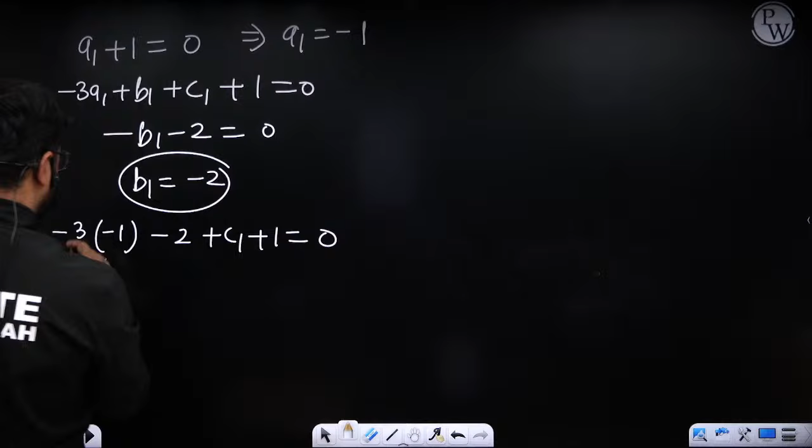Okay. First of all, this will give you A1 equal to minus 1. This will give you B1 equal to minus 2. Let's put this here. So it will be minus 3 into minus 1, minus 2, plus C1 plus 1 equal to 0. So 3 minus 2 plus C1 plus 1 equal to 0. So C1 is minus 2. So those who are giving minus 1, minus 2 and minus 2, that is the right answer. Okay. Let us put all these values here.

So pi 1, which is the first dimensionless number for you, is rho to the power minus 1, then v to the power minus 2, and d to the power minus 2 again, into Fd. So first dimensionless number, which is pi 1, is Fd divided by rho v square into d square. Is it the dimensionless number you are having in the option? Yes.

Option A. Clear? Now, we don't know about other options. We'll find out pi 2 also. So pi 2 again, if I write it, rho to the power a2, then v to the power b2, then D to the power c2. One more variable which is left for us is mu. We'll take that, mu. Again, writing the dimensions M0, L0, T0 for pi 2, which is a dimensionless number.

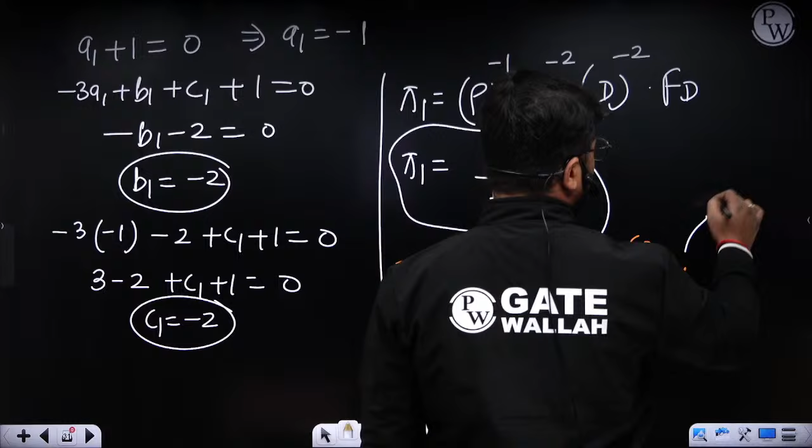Density, it is ML to the power minus 3, a2. Velocity LT minus 1, b2. D, it is only L to the power c2. What about mu? Your unit of mu is kg per meter second. So the dimension will be M, mass for kg, L minus 1, T minus 1. Again equate and give me the values of a2, b2 and c2. I want these three values.

So with this problem, actually we have revised the Buckingham method. This is basically the Buckingham Pi theorem. Is this method clear to all of you now? After solving this question through this method, is this method completely clear to all of you?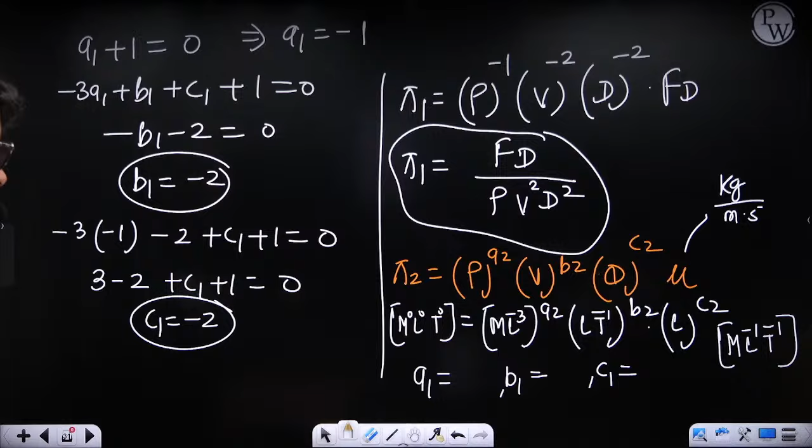All three values are minus 1. Okay, minus 1, minus 1, minus 1. Let us put all these values. So pi 2 is equal to rho to the power minus 1, v to the power minus 1, D to the power minus 1, D is capital D, and then you are having mu. So pi 2 we are getting mu upon rho v D.

So with that, again we are having an option. If you see, it is rho v D by mu. This can also be the right option for you. So I think this question was an MSQ question, because option A and C both are right. Now see, sometimes, not always, if you have a complete idea of the many formulas which we generally see in fluid mechanics, then with that idea you can actually find out this option also without any calculation.

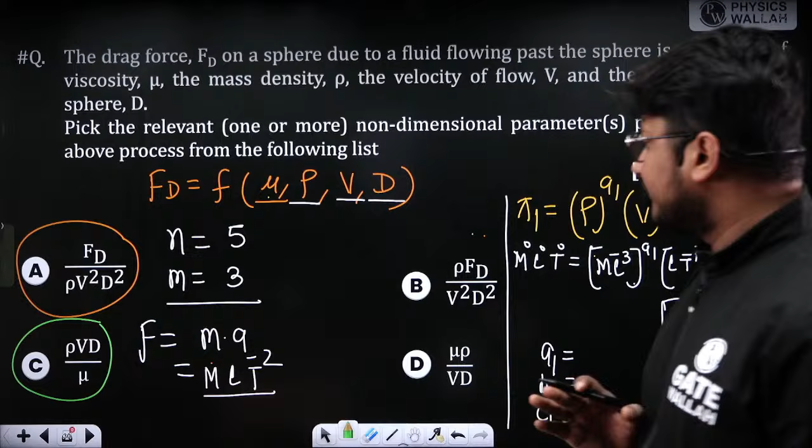For example, have you heard about a non-dimensional term which is Reynolds number? The general formula for Reynolds number is rho v D by mu. Here diameter is capital D. So 1 upon Reynolds number, it will be mu upon rho v D. Reynolds number is a non-dimensional term. So they have written rho v D by mu, which is nothing but a Reynolds number, a non-dimensional number for you. So directly I can pick option C.

Now I have told you in the impact of jet formula, F is equal to rho A v square. Rho into area is pi by 4 into D square into v square. So pi by 4 is anyway constant for you. So F upon rho into D square into v square is pi by 4, which is a non-dimensional term. F upon rho D square v square. Am I right or wrong? So this is your option A.

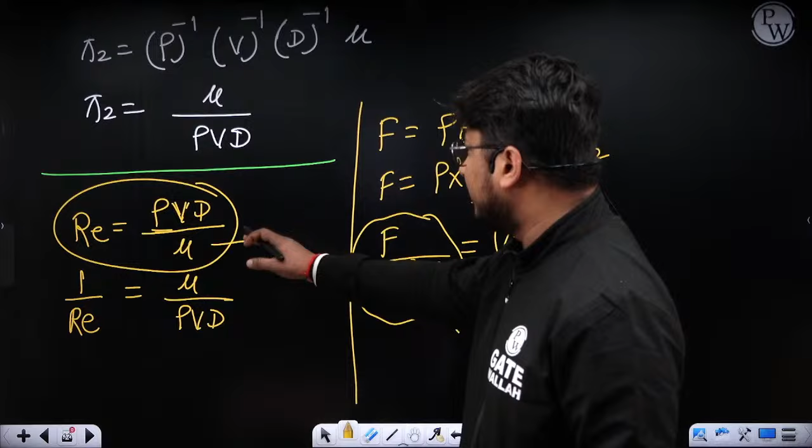But this type of sense will come only when you have a complete set of all the formulas in your mind. Otherwise you will go with the normal process. So I told you both methods: going with the Buckingham Pi theorem method, and another is going with the formula which you know. Is that clear? Okay.

Next, which problem should I give? Try this one.

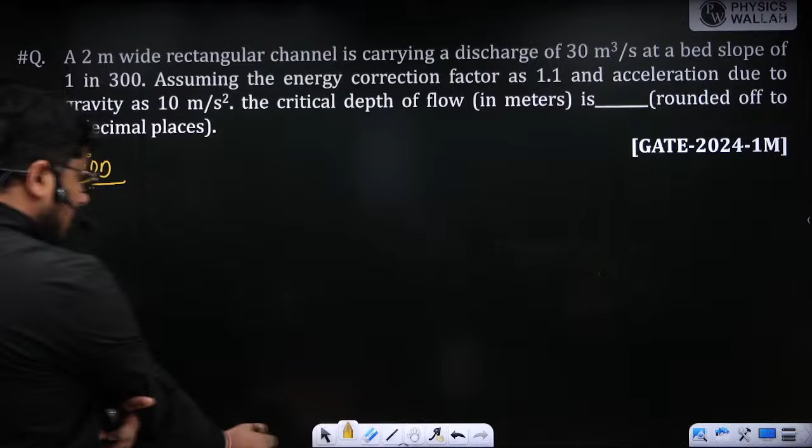Okay. They are talking about the critical situation here, and they are saying that the energy correction factor they have added is 1.1. So energy correction factor we add in what component of our total head? If I write specific energy, it is y plus v square upon 2g. Energy correction factor we add in y or in velocity? In velocity head we add or datum head we add? Something we have revised yesterday also.

We add here, na? Y plus alpha v squared upon 2g. Okay. So E equal to y plus alpha small q square divided by 2gy square, I can write it in this way. I don't think anybody will have any issue here.

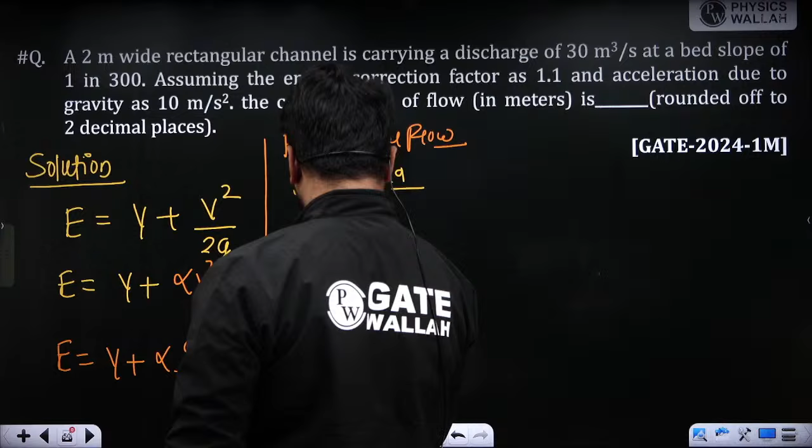Now they want a critical depth, and you know for critical flow, your specific energy will be minimum, and for minimum, dE with respect to y will be 0. So it will be 1 plus alpha q square upon 2g, and differentiation of 1 upon y square will be minus 2 upon y cube, equal to 0. Now here the y is yc actually, because we are talking about critical depth.

So 1 is equal to alpha q square upon g into 1 upon yc cube. 2 and 2 are getting cancelled. Take yc in the left side. So yc will become alpha small q square divided by g to the power 1 by 3. So you can make this as a formula also: whenever energy correction factor is given, we'll multiply alpha with q square. Alpha q square divided by g to the power 1 by 3.

Now this was the complete small derivation which you can do if you know where we have to add alpha. While explaining the Bernoulli equation concept, I told you for a non-uniform velocity, we add the energy correction factor in the velocity head part. Now find out the yc value with that formula. Alpha 1.1 they have given you, divided by g is 9.81. Alpha is 1.1, that means it is somewhere near to turbulent flow.

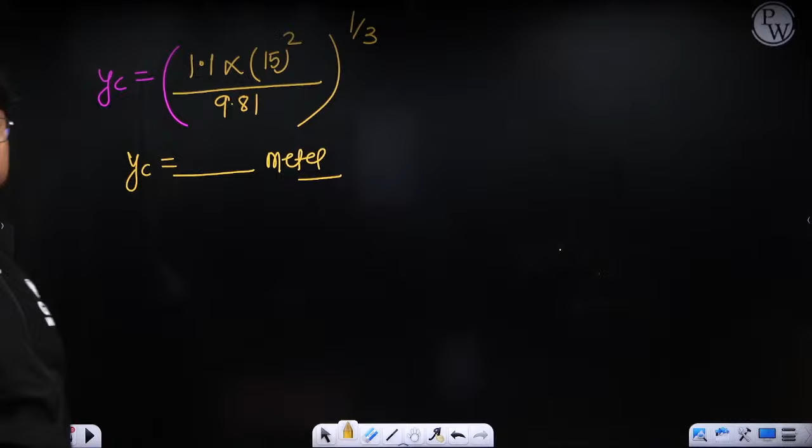Sir, for direct formula uses, directly you can use the formula. I am actually not a fan of formulas. I don't want you to impose formulas on yourself. So instead of that, I go with basics every time. If you are comfortable remembering all the formulas, it's up to you, my dear. But as a teacher, I will tell you both: the basics and the formula.

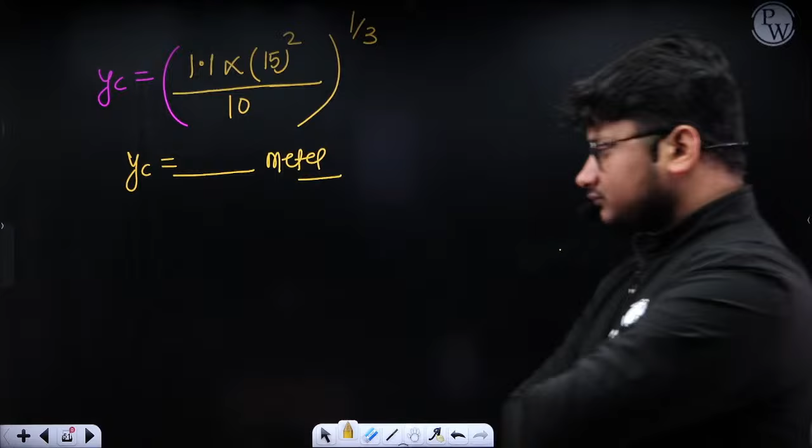One second, my dear. Here g they have given 10 meter per second square, so we cannot take 9.81. If they have given 10, then we will take 10. In that case, we will not go for better accuracy; whatever they have given you, we'll take that only. According to your answers, I can see 2.91 and 2.93. Which one is right? 2.914 is the right one.

Okay. Another question. It is a simple question for all of you. If g is given as 10, then we'll take 10 only. If it is not given in the problem, we'll take g equal to 9.81. If it is given, we don't have to worry, we'll simply take 10.

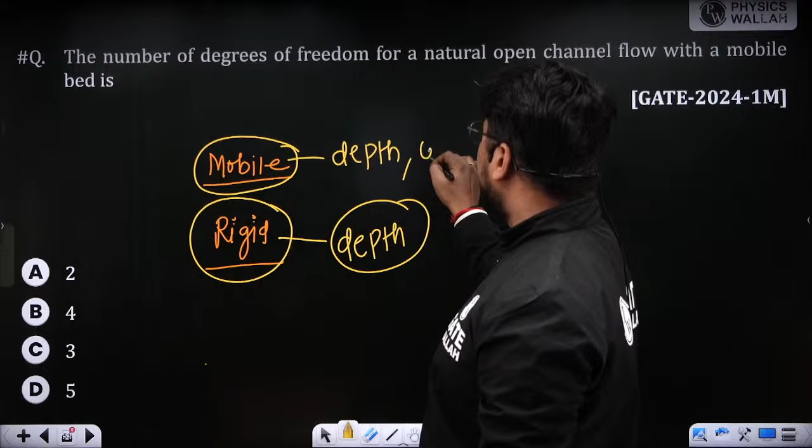In mobile channel, which can change its shape and size, you have multiple variables. You have depth, then width, then slope, then planform, or tortuosity, or the alignment of that river. Sometimes that also changes. So a mobile channel has 4 degrees of freedom. The right answer is mobile, so 4.

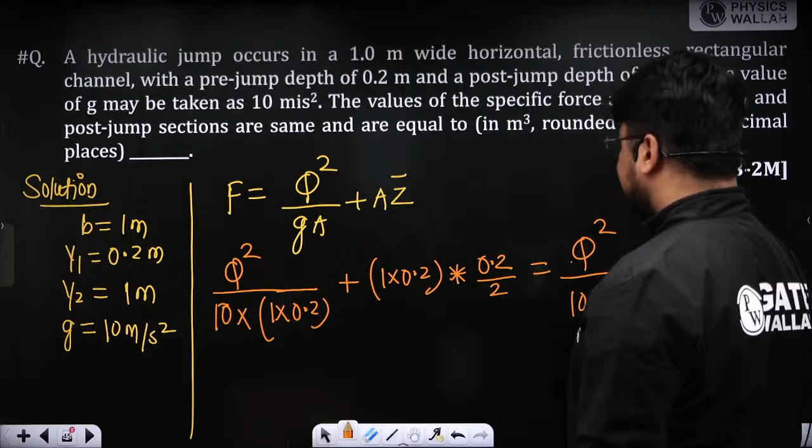So Q square upon g, which is 10, into area, B into y1, it is 0.2, plus area again 1 into 0.2, and Z bar will be half of this, 0.2 divided by 2, equal to Q square upon 10 into area, this time 1 into 1, width is 1 now, plus 1 into 1 which is the area into 1 divided by 2, since y2 is 1 now.

So first of all give me the value of Q, and then we can calculate the specific force formula. Q square upon g will do it, but first I need the value of Q from all of you.

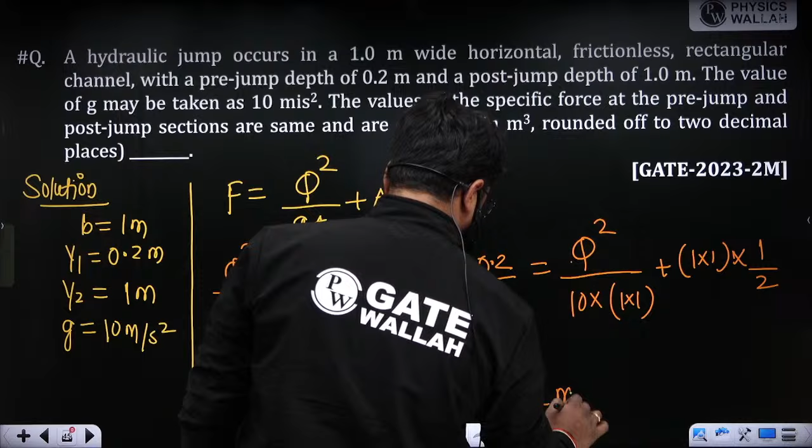This one is 1.095 according to you. So in that case, 1.095 whole square divided by 10 into 0.2, plus 0.2 into 0.1. You guys can give me the final value. You can calculate either with the pre-jump depth or post-jump depth; for both cases you will get the same answer. 0.62. Okay.